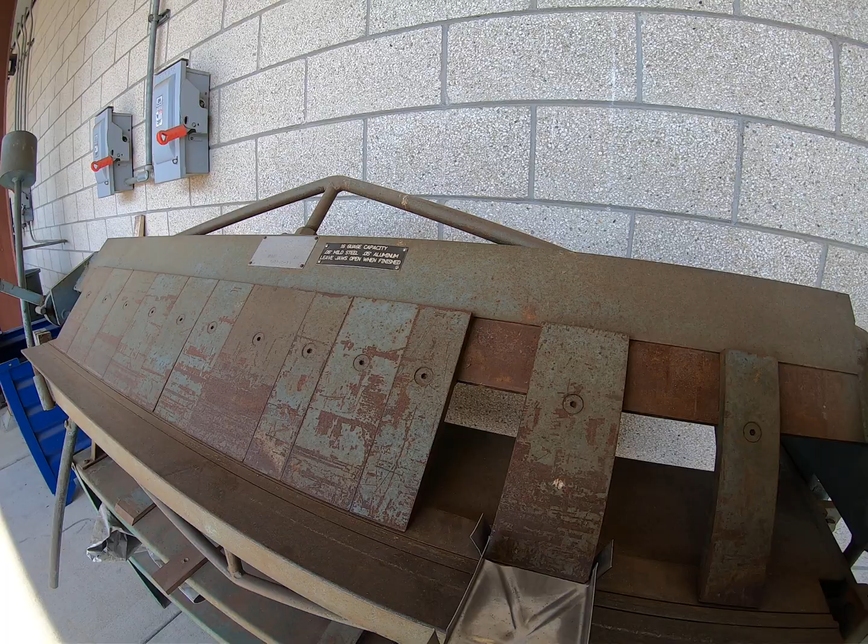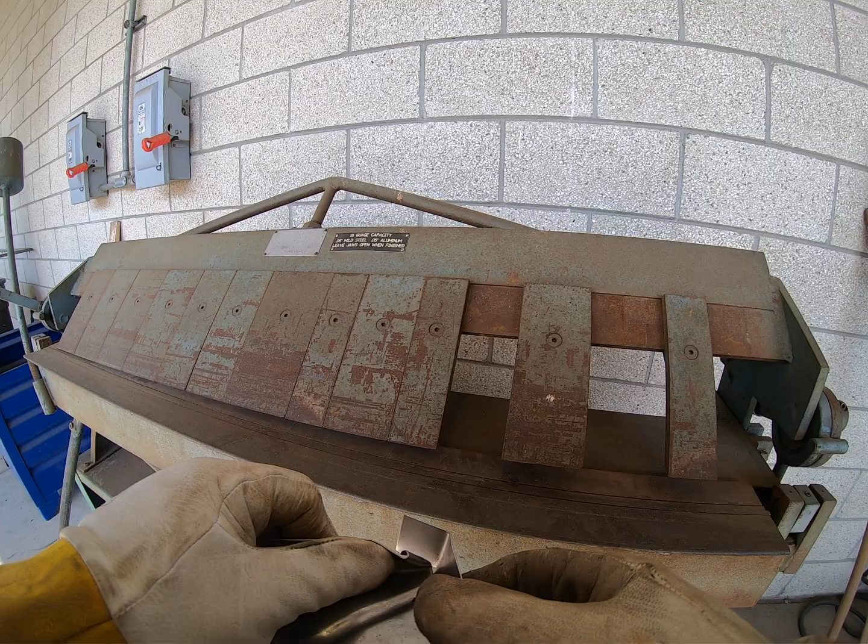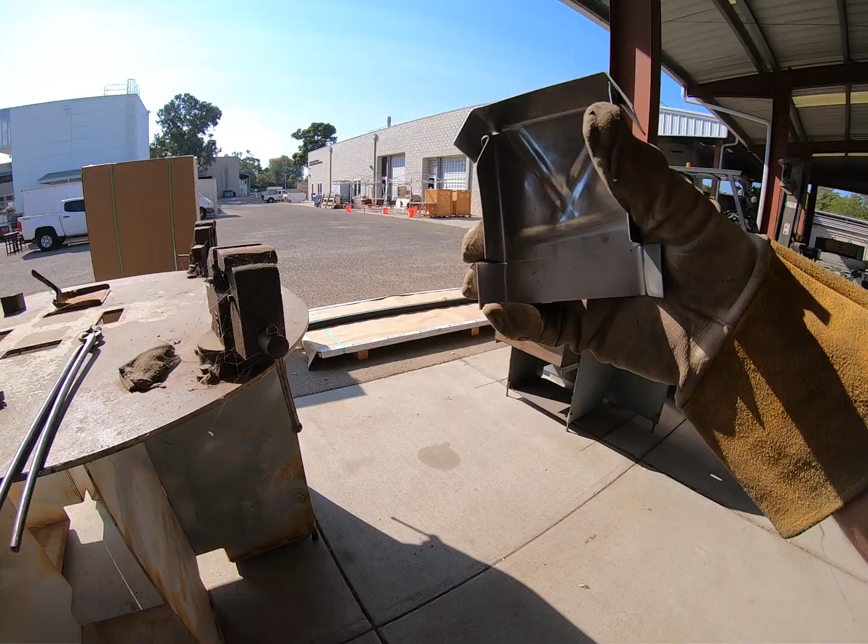Up and over. Now you see I did not take great care, and I bent up this edge right here. That's going to be a little messy, I have to admit. All right. So I'm going to just bend this out a little bit. There are vices right here, so we can always clamp it down, straighten it up.

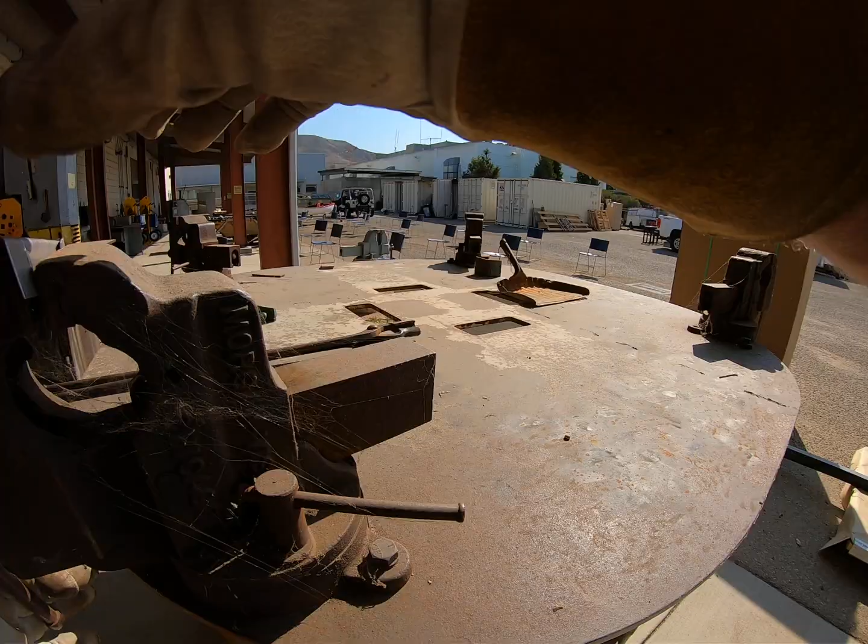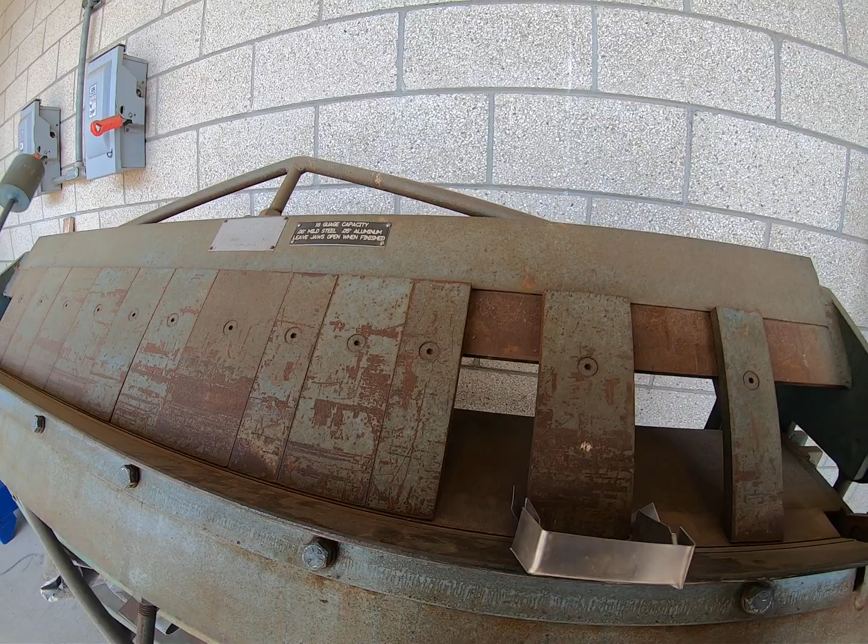Now, although this metal is very soft, it's fairly sharp, so be aware of that. Gonna grab the other side now, and this time just take a little bit better care not to catch those edges. I'm just gonna flare them out, and then as it goes up, I'm just gonna carefully watch. You can see this one's hitting right there. I'm just gonna carefully watch to make sure that I'm not making a mess again.

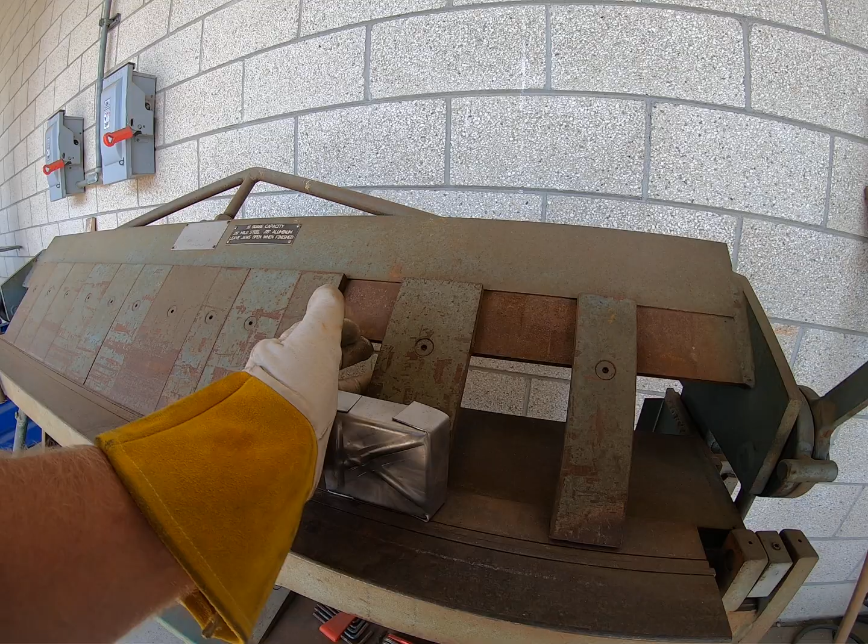Just like so. So that's how proper you want it to be. You should get to a point where it looks about like this. Good. Now we're just gonna stomp all these flat. Put it back in the finger brake. Stomp these flat. If I see any kind of out of vertical alignment now, I can go ahead while it's in the clamp and straighten that out. This is where you're going to want gloves so you don't slice yourself real good. And then again, I went ahead and stamped that crease permanently into there.

Now you can see this one leg is bent out. So I'm just going to put that in the box and pan brake. I'm going to clamp it down. I'm just going to straighten that up. Part of the reason why it's bent out is because that little piece of sheet metal is in its way. Just like so.

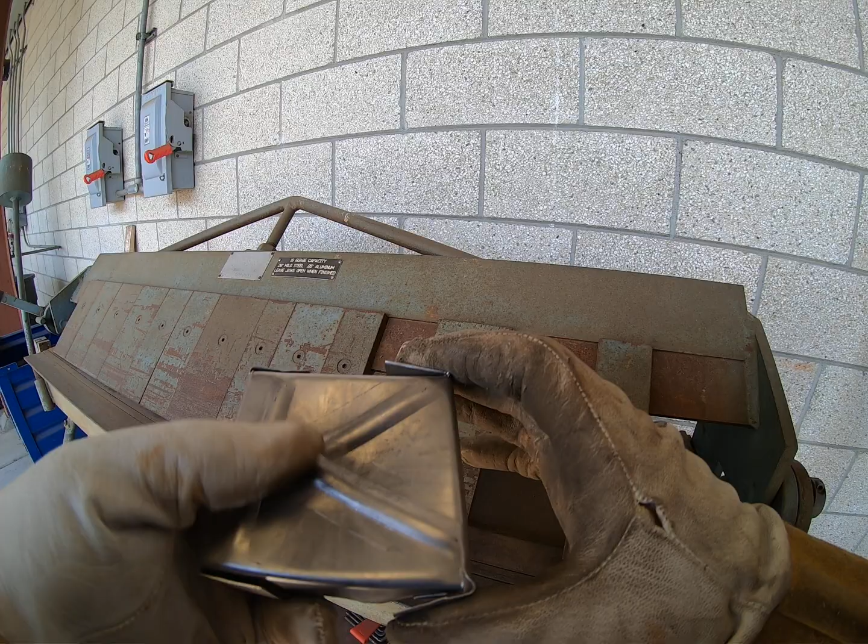Now these legs here must be all the way flush in order for us to spot weld, so I'm going to go and stomp these in. Just squeezing it down, making it hit real good. Just giving a little ground check there. Make sure it's nice and solid.

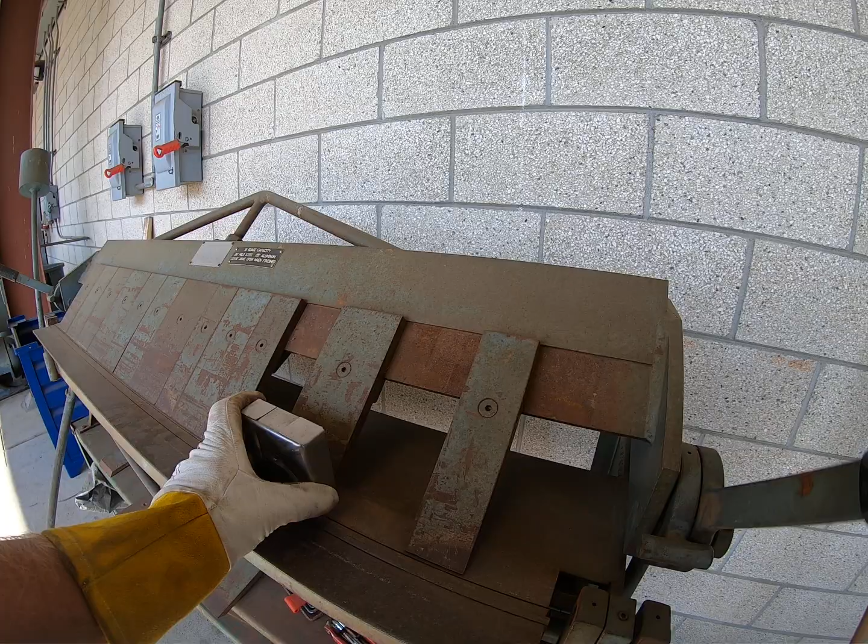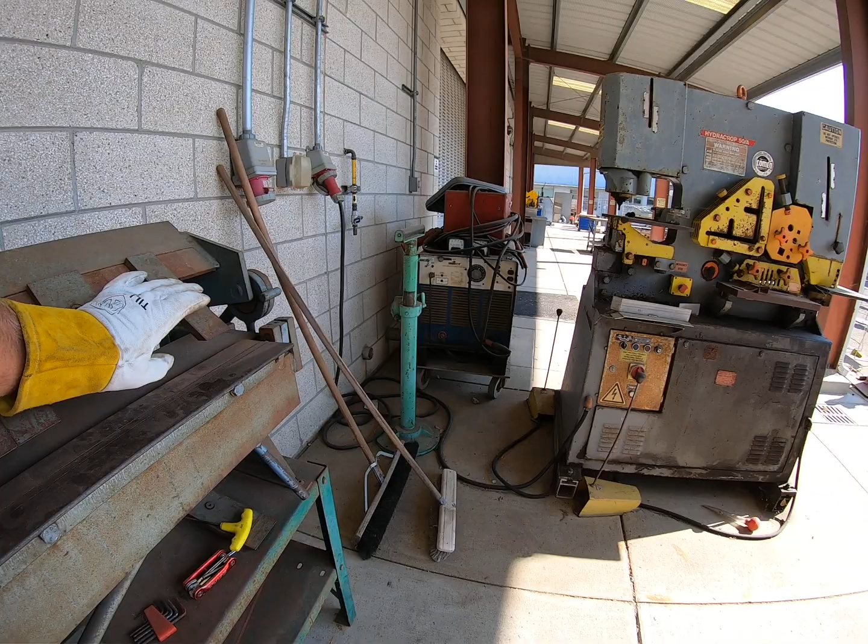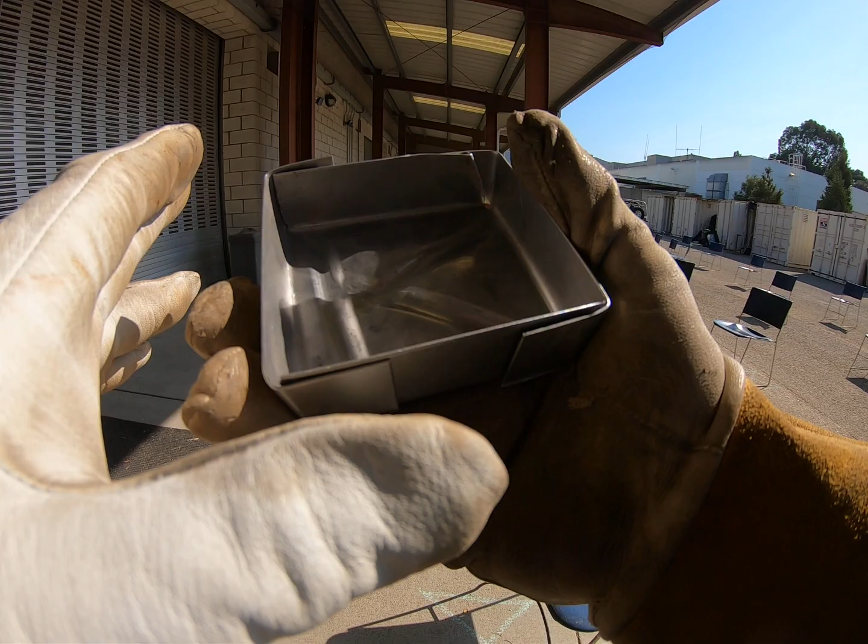All right, when you're done with the box and pan brake, you always want to leave this edge open. That way this doesn't get rusted to the edge and cause a big mess. So we want to make sure that this edge stays nice and tight for us. All right, we're through that step. This one up here is a little open. So 2 of these are going to get riveted, and 2 of these will end up being spot welded. Let's start with the rivets first. That way we're not handling a hot potato.

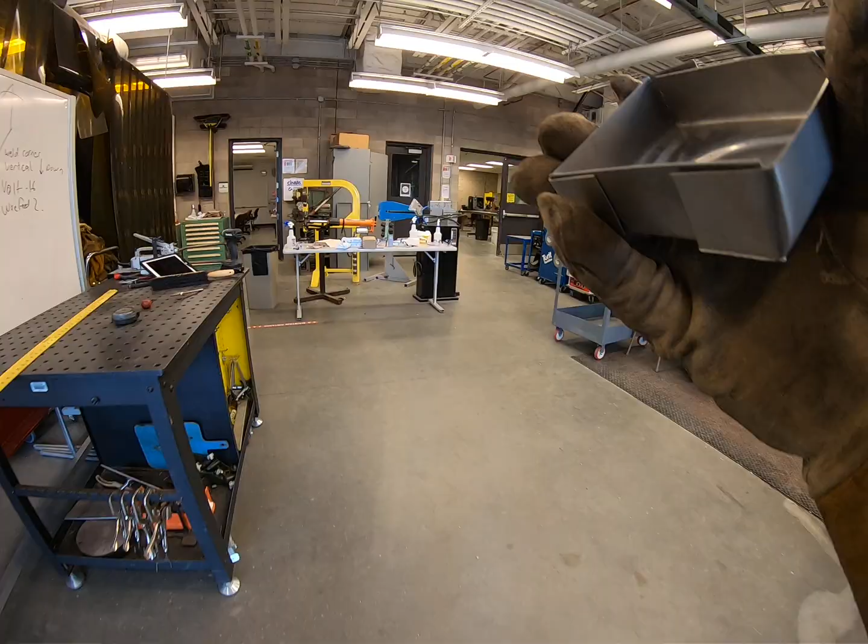So, grab the drill, and it's important that you want to drill onto something, and preferably into something. So out here, find a cord in this little pallet that's left out here for us, and away we go. See if we can find something to boost up this end. I guess not. There we go. Just like so. Make sure the drill is spinning clockwise, because that's how the drill bit works. And I'm going to rivet these 2 right here. Just like so. A couple of holes.

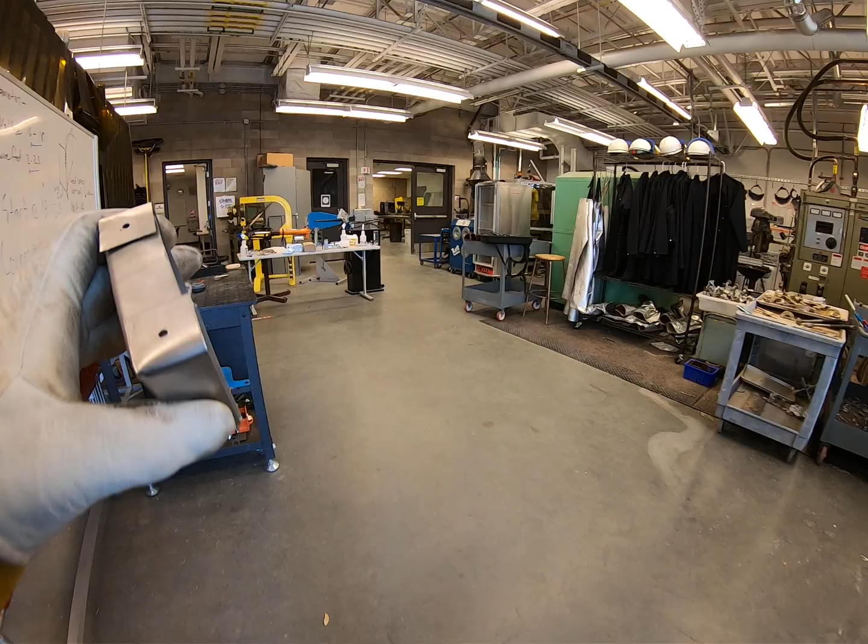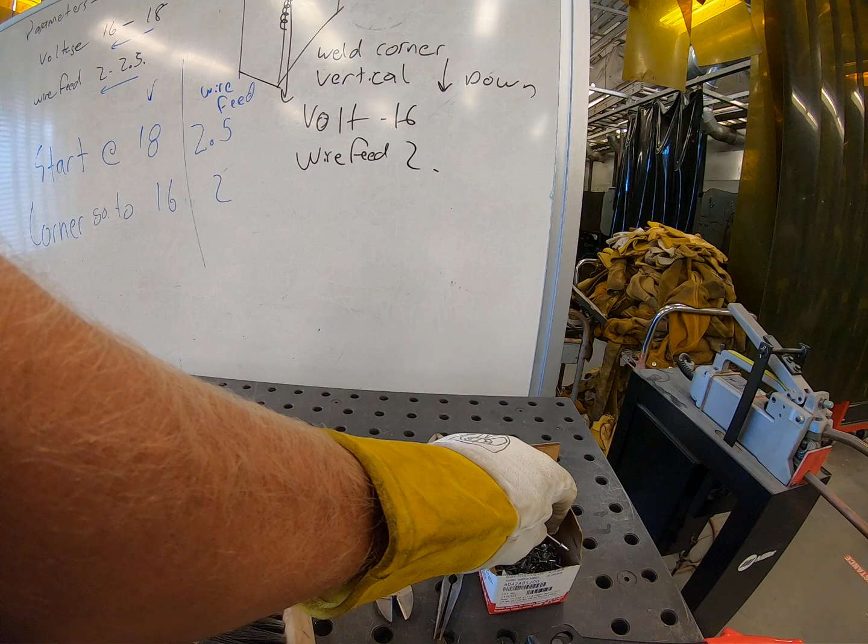Pop rivets, which is what we're using today, are blind-sided pop rivets, which means we can put them in without seeing the other side. Pop rivets just slide right in the hole. Pop rivets have a couple of variables. First off, there's this shaft, this piece right here, the rivet diameter. That determines how much strength we're going to have overall. Second, there's a grip, and that's the length between these shoulders and this tip.

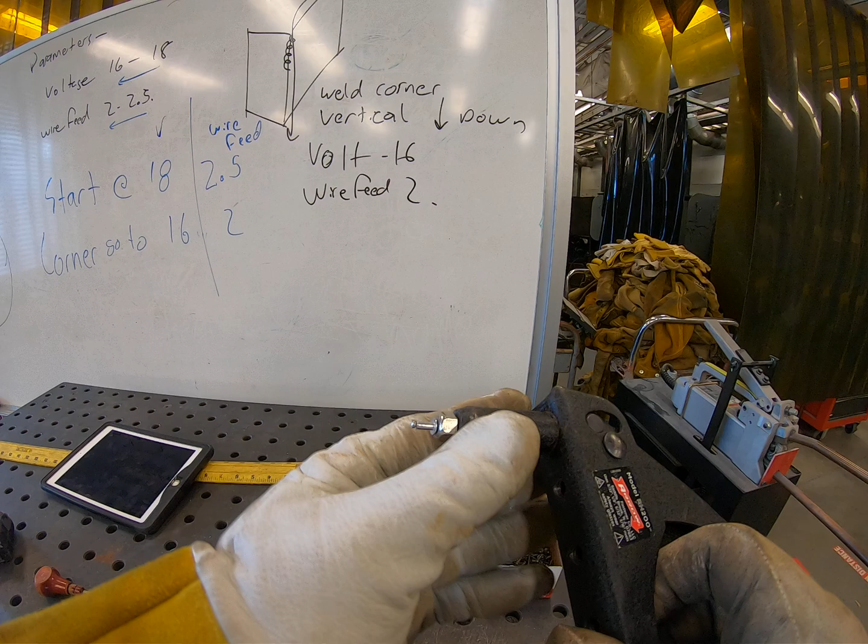When you put the pop rivet in the gun, you just slide it in like so. And then as you pull the handle, you'll see it just wads up the other side of the rivet on the other side of the sheet metal. Eventually it pops off when it reaches its full capacity. That's why they're called pop rivets.

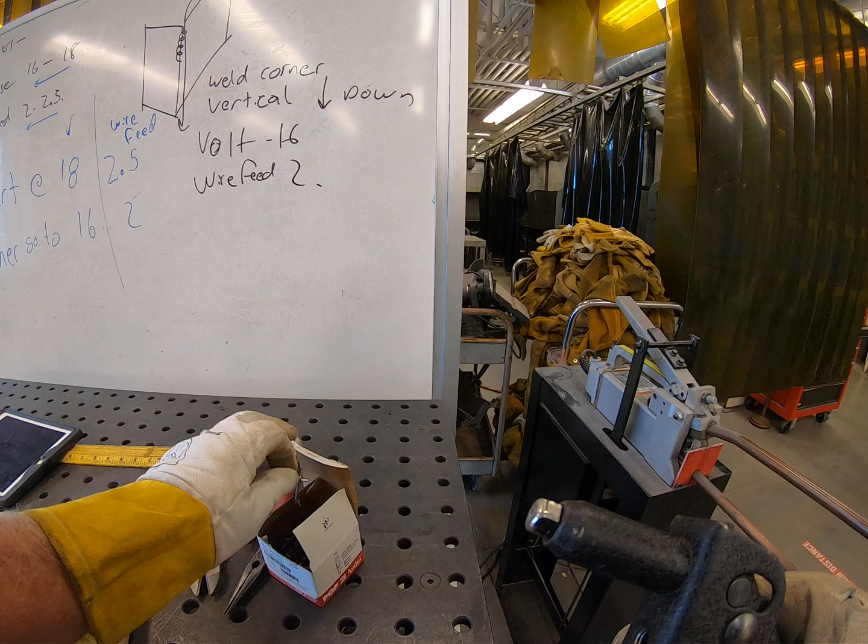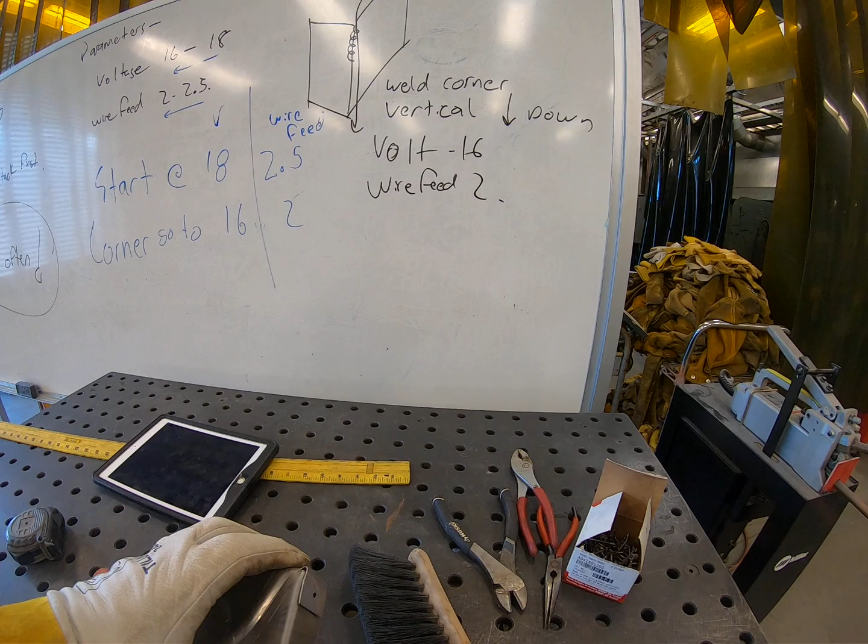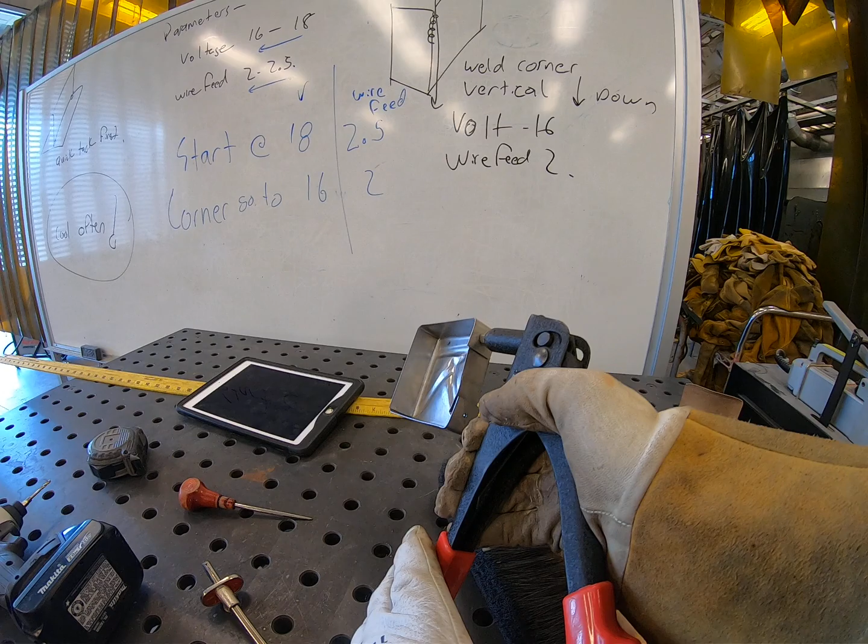So we're going to put it in the gun first. So that's sticking out like so. Slide it into one of the holes. Make sure it's grabbing both pieces. Then as we squeeze it, you'll see it'll just form up on the other side, nice and simple like. Boom. And then one more time. Just like that. Sometimes the rivet doesn't break where you want it. That happens, especially on a hot Saturday morning. Let me just clip it off like that.

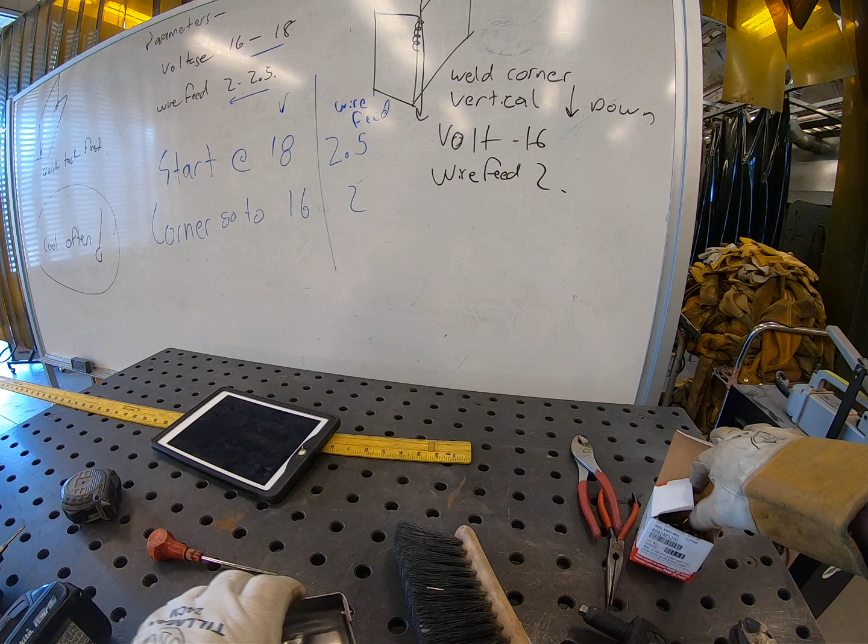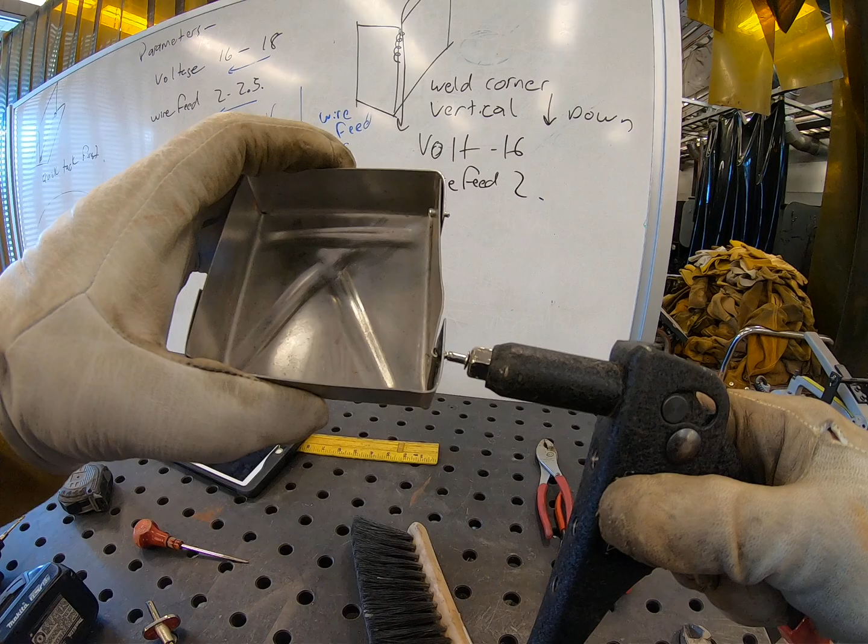Finally, another rivet. Again, just slide it into the gun. Make sure this little nut here is tight. Looks like it's good. Just hand tight's good. Slide it through so it lines up both holes. You want to get it all the way so that it meets that shoulder against your flange before you start squeezing. And then just squeeze down. Boom, and that one worked like it was supposed to.

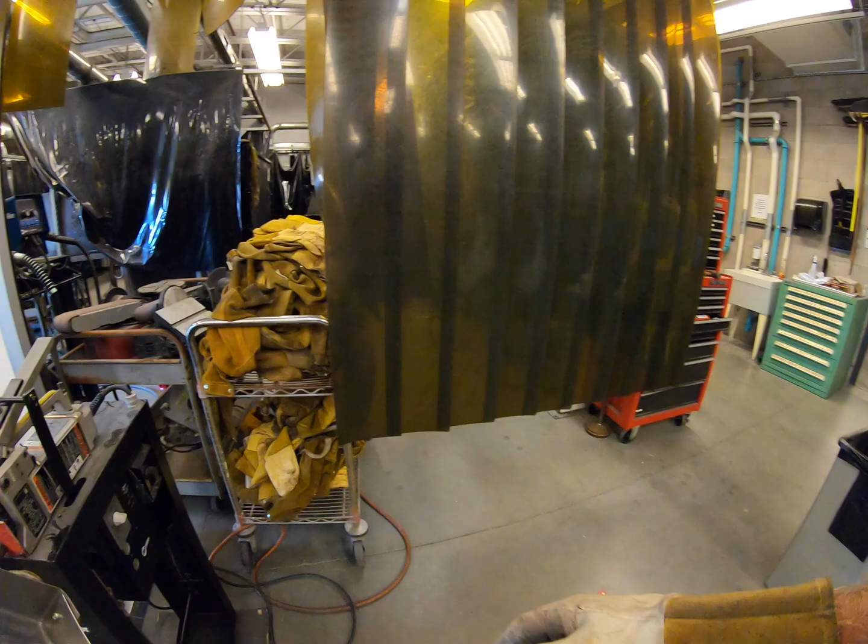Okay, finally, this is our resistance spot welder. We're going to take this knob here and dial it up. That turns it on. We're going to squeeze this lever together, which will bring these jaws together over here. Just like that. Now, this is not a pair of vice grips. It's not going to pull your metal together. If it's not already together, it's not going to pull it together. So make sure that's touching adequately, like that right there and that right there.

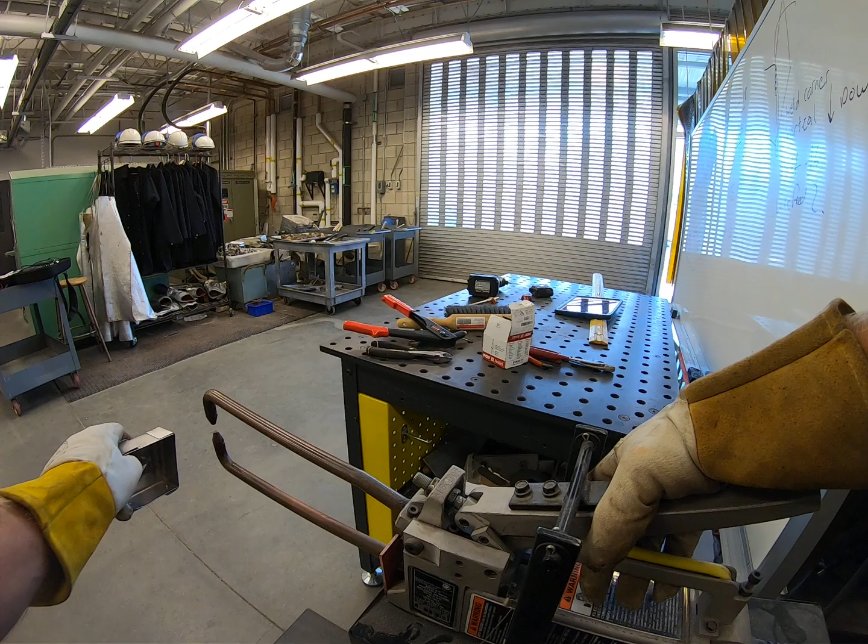Good. And then finally, this switch right down here, that actually cycles it. Now, this is an automated one. So once you get it in and clamp it, you can let go, hold the trigger, and the machine will automatically cycle completely through and turn itself off. So if you listen, you'll hear the relay pop. Ready? Here we go.

Just like so. So resistance spot welding actually has 4 very distinct steps. We squeeze the 2 pieces of material together. We weld them. You see how I still have the jaw closed? It's because the next step is called hold. This is hold time, and we're actually allowing for these 2 pieces to cool and fuse together. And then off time. So squeeze, weld, hold, and then off time is just the human factor moving from spot to spot.

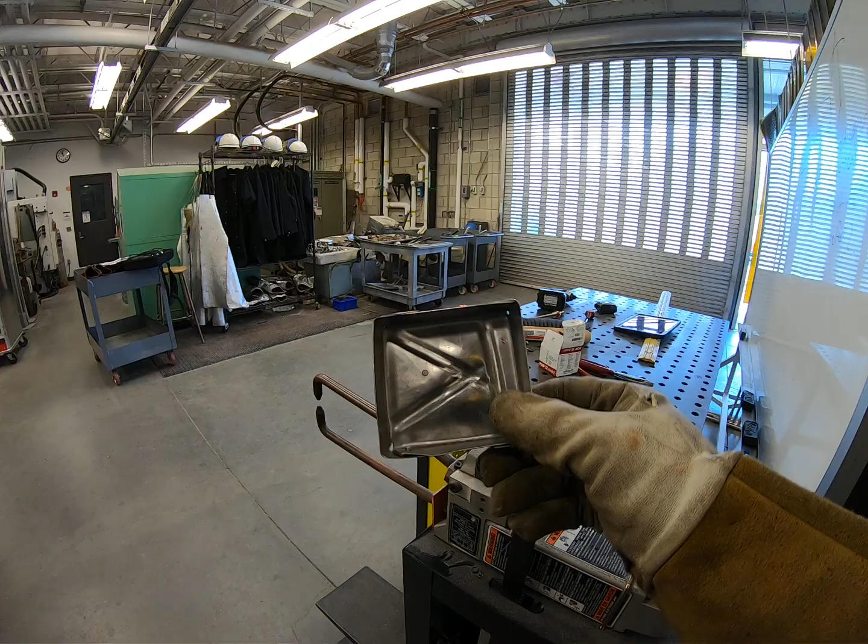There you go. This is the letterbox. We will be performing this soon. Take notes of the key points, and as always, we will put the common mistakes up on the whiteboard during your lab. Have a good afternoon.